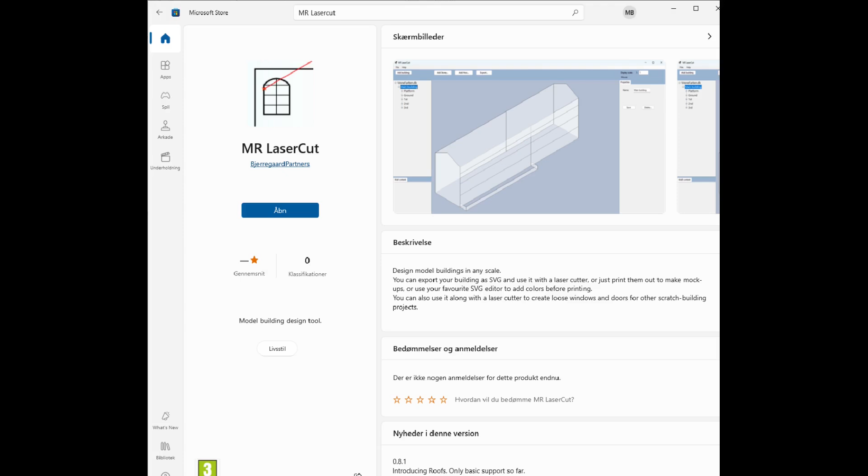It's free, there are no commercials, no requirements for an account, no newsletters, and no nasties. I plan to make a small series of videos and we'll start it off now with a simple freestanding workshop.

Data is stored in a database, so we start by making a database for our new building. Let's call it workshop. You can have many buildings in a database and you can make all the databases you want.

So we have a database and we add a building. And we give that a very fancy name also. I plan to cut this in 2mm MDF, so we set the base to 2mm.

Then we add the ground floor and we add some walls. We want a rectangle. This is scale 1:1, all measurements in the database are 1:1. So this will be 10 meters wide. Let's say 6 meters deep. That's enough for, let's say, a car to drive in and be serviced or something.

So these are the 4 walls, and we can decide that this one is the front wall. And what I have in mind will require this to be a little taller than 3 meters, so we'll make it 4.

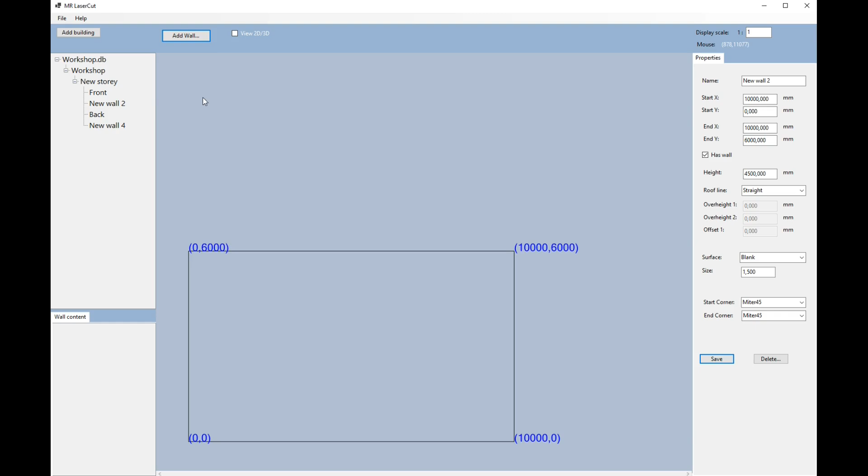That'll give us something like this. And we can add a roof that runs from the front to the back. We can decide on the overhang of the roof afterwards.

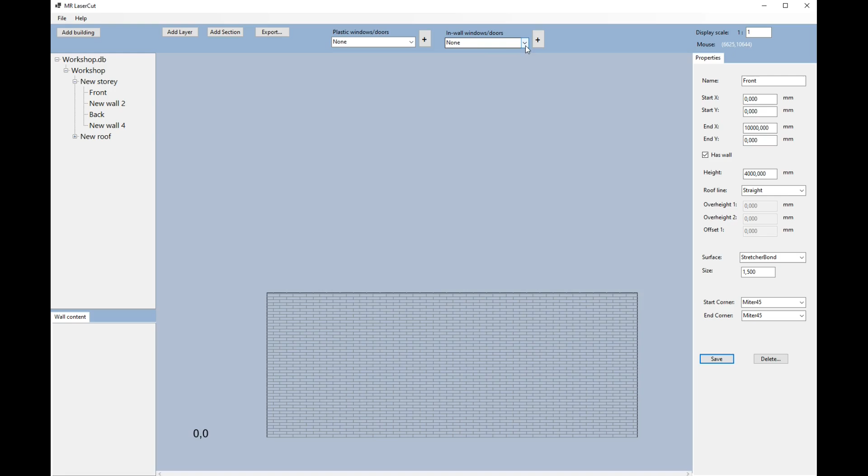Let's go to the front and see what we want here. We definitely want brick. And probably a couple of workshop ports.

Move that down to there. And add another one. And move that to, I don't know, 35, is that good enough? Maybe.

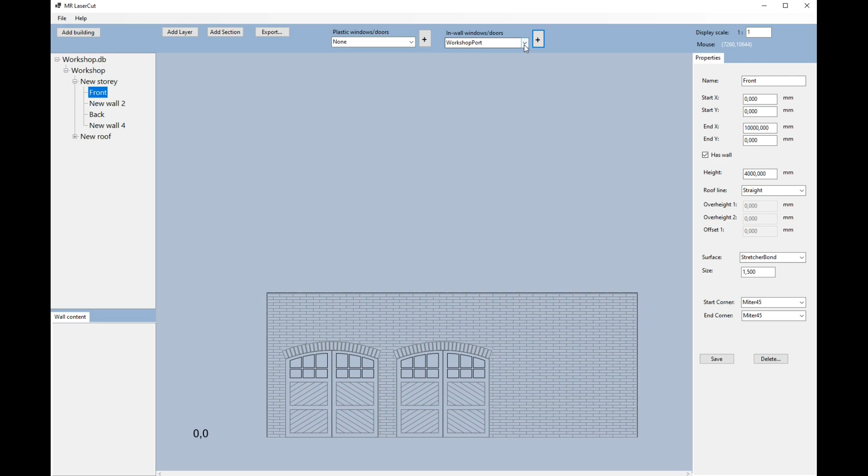And we want some nice arches above them. Maybe a window.

This is 10 meters wide all in all, so let's say 6.5. A little more maybe. Just put a door in first.

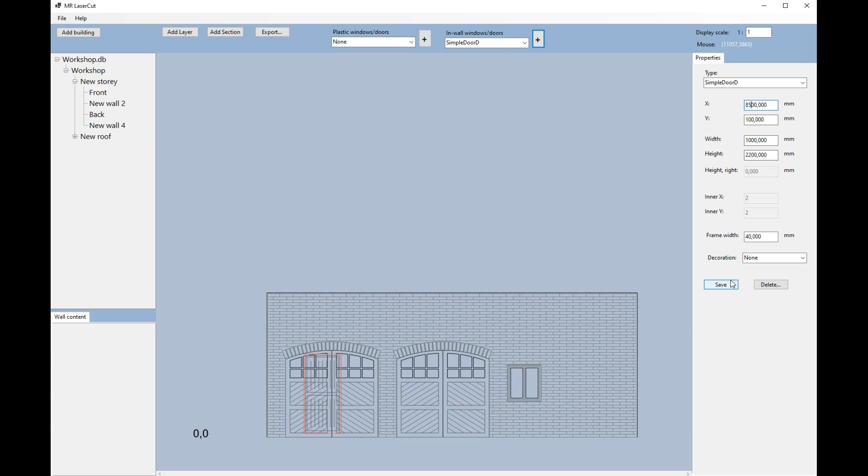Lift this one up a little so it's aligned with the door. Like that. And a little more to the right maybe. That's probably too much. Yeah. There.

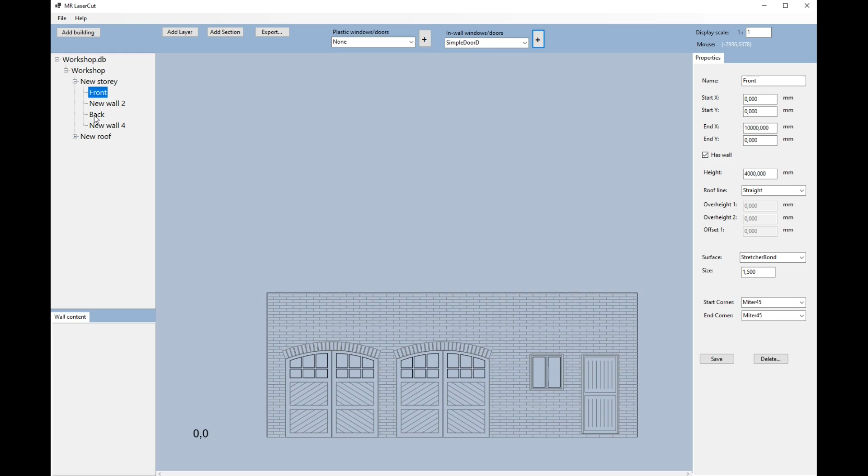And at the back we probably want a door just opposite of this so you can walk straight through. That'll be on this side then.

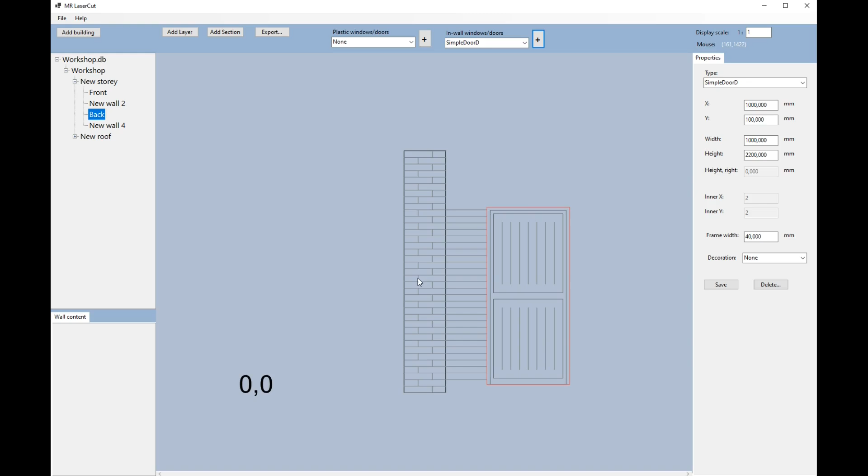We want bricks here too. That to... 500. Oops. Aha, I set the wall to 500 instead of the door. My mistake.

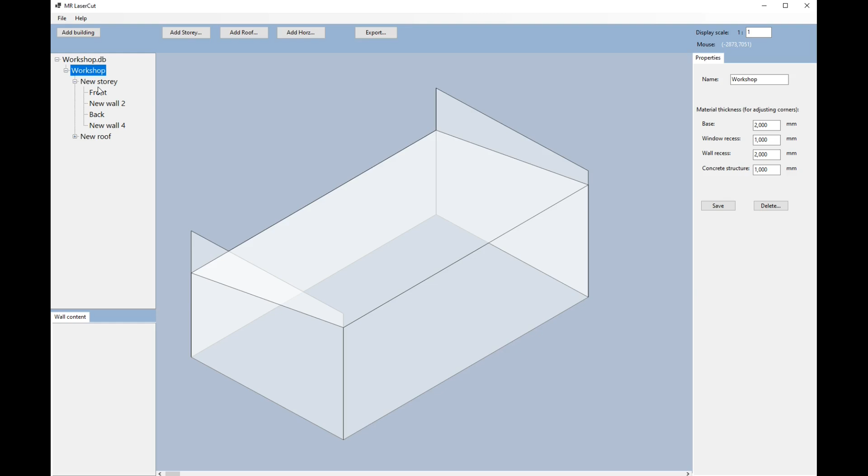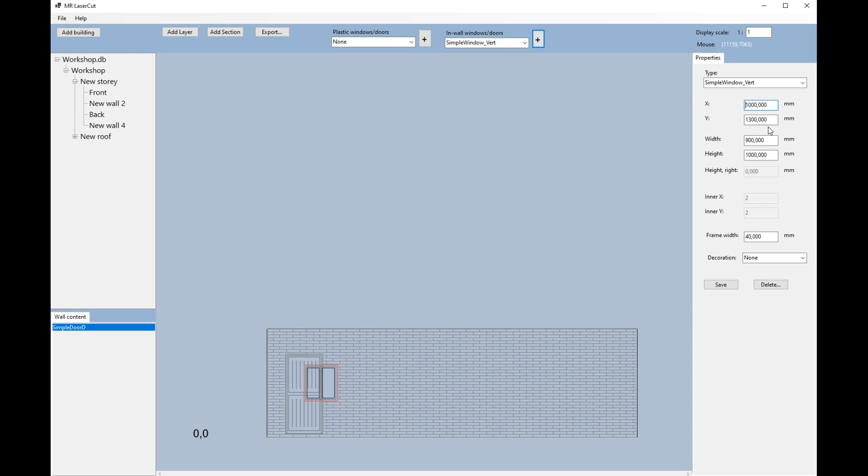Just move the door down to half a meter from the edge. Yeah. And add a window again. Like that.

Then this wall, we also want brick. And this wall, brick. That's really it for a start.

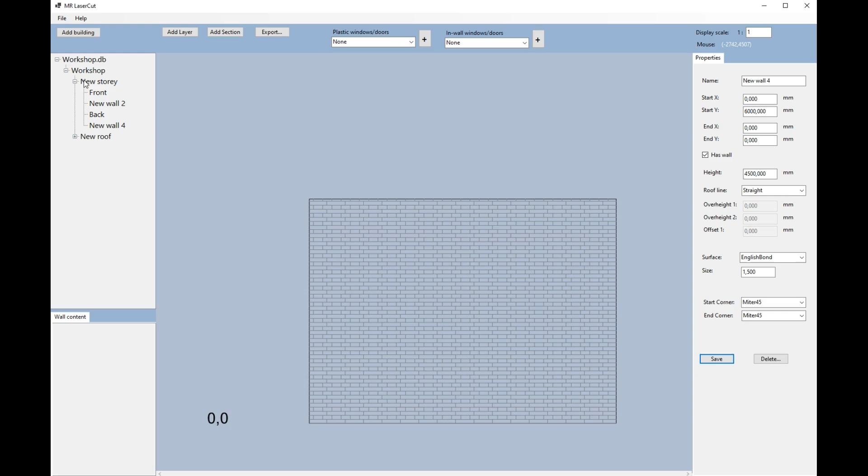Let's export it. So we export to a folder here, a base folder. Under that, it'll have a name. There'll be a new folder for the workshop.

We export in scale 1:87, that's HO. You can choose anything you want.

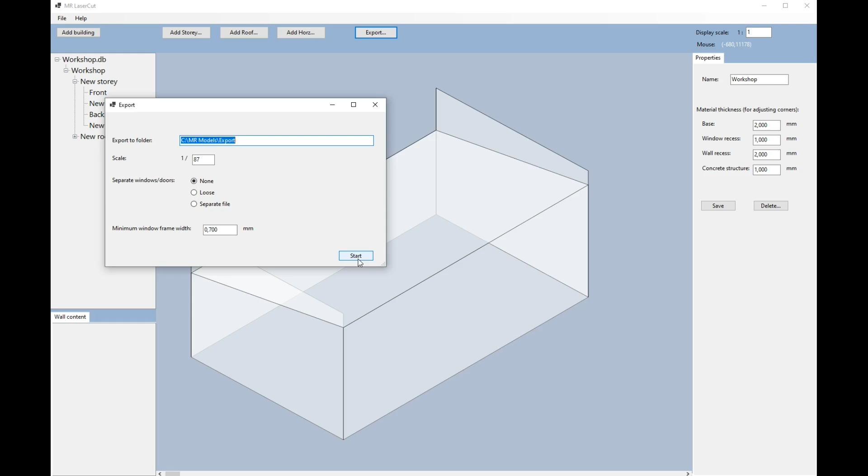We want the windows to stay in the walls when cutting. You could also have them loose. That means you could paint them separately and then glue them back in. Or you could have a totally separate file if you wanted the windows to be cut in a different material maybe. But we'll stick with having them stuck in the wall.

Despite its name, MR LaserCut does not cut anything with a laser. I use LightBurn for that.

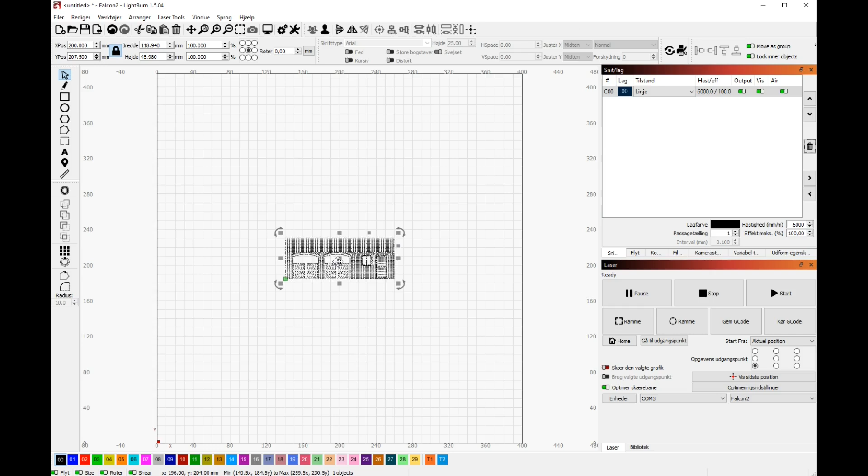Here's our front. Just move it down in the corner. Let's say something like that.

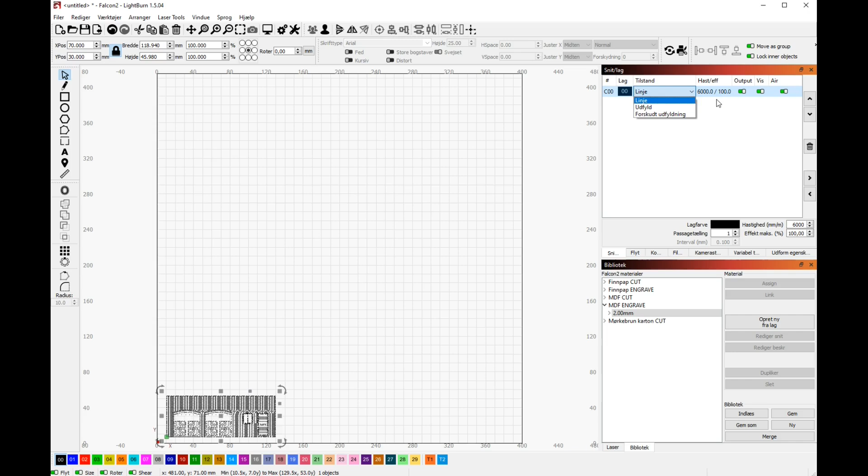And we want to cut this in MDF. Oh, this is an engrave, so we want to engrave this layer. Like that.

And here's the rest of the front. We'll move that to the same position. There. And give it another layer. And this one will be the cut. Like that.

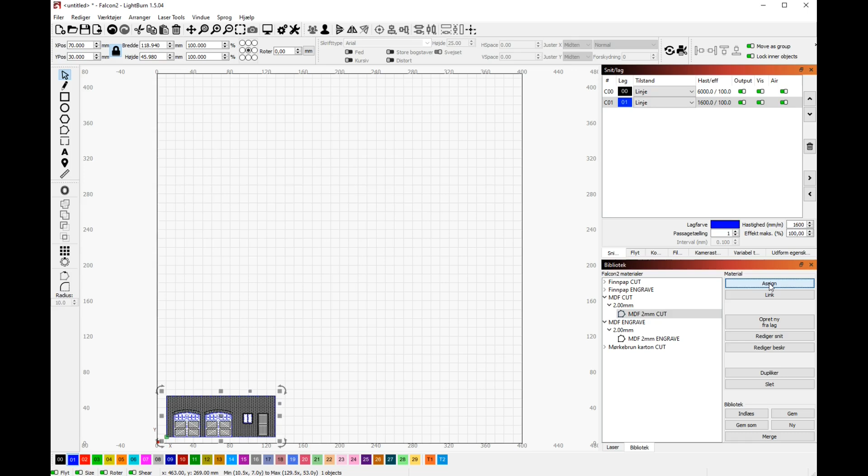You can see the different speeds and effects of the laser. I mostly use 100% laser power, but the speed varies very much, so cut is significantly slower than the engrave, of course.

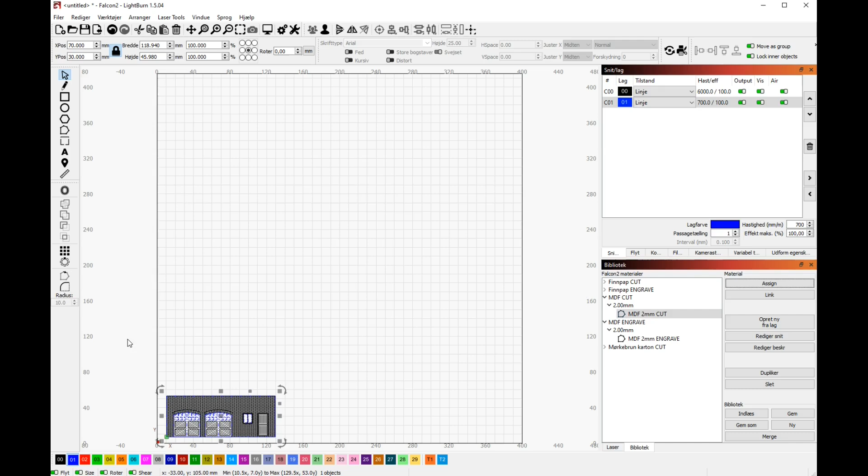Then we'll do the same with the rest. You can probably hear the exhaust running in the background. I use a Falcon 2 from Creality, works pretty well.

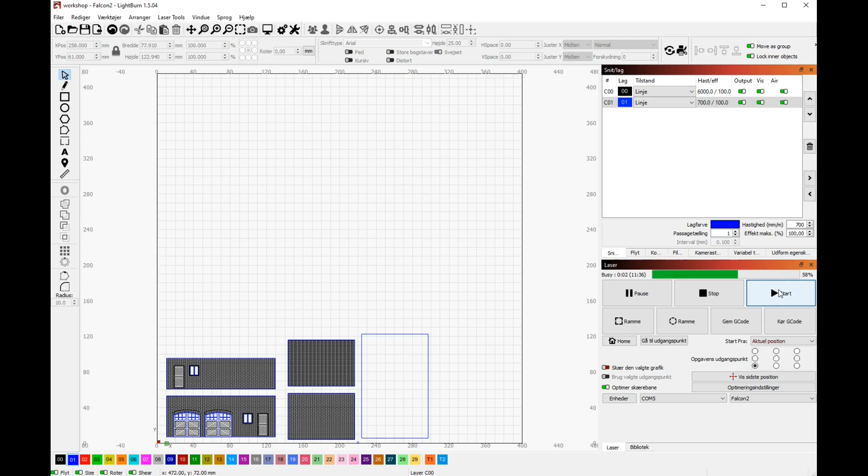Quiet again. Now 4 walls and a roof ready to paint. I won't bore you with my pathetic painting skills, there are so many other YouTubers that can do it better. So here's the finished result.